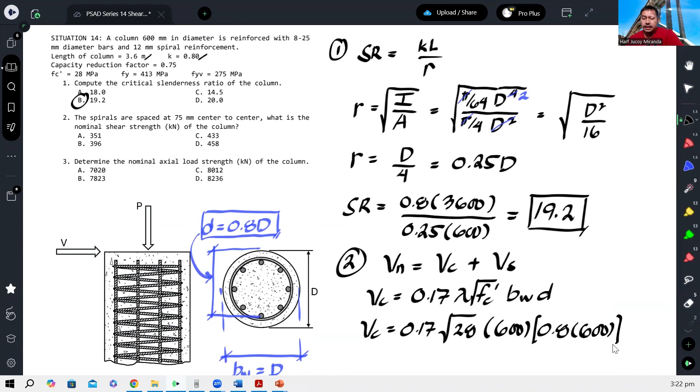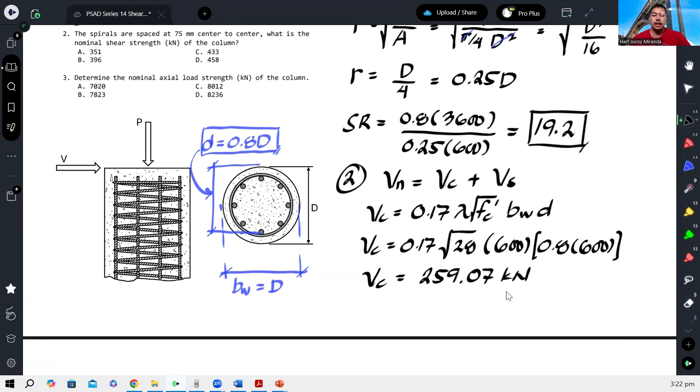Okay, and that gives us 259 kilonewtons o 259.07 kilonewtons. So pakita ko lang. Ayan. Okay, so 259.07 kilonewtons. That is the nominal shear strength provided by the concrete. Next, kumpitin naman natin yung nominal shear strength provided by the steel. No? So that is, again, AV FYV D over spacing.

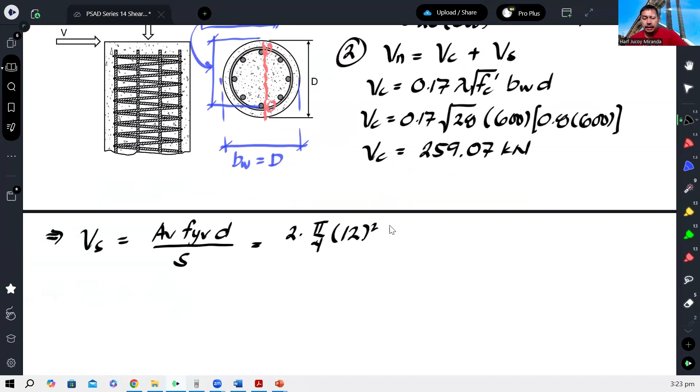So yung yield strength ng spiral ay 275. And then yung effective depth, once again, 80% ng diameter. Okay, over spacing. So yung spacing na binigay is 75. Okay, so makakompute naman natin this time yung nominal shear strength provided by the steel. So 2 times pi over 4 times 275 times 0.8 times 600 over 75.

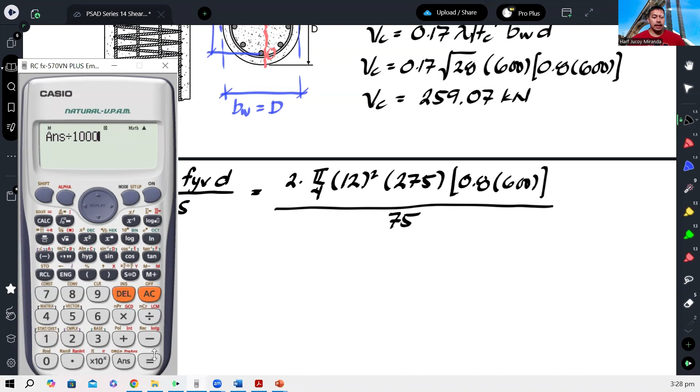Okay, so, sorry, may nakalimutan ako. Pi over 4, times 12 squared. Ayan, 75.8. Okay, so yan naman yung nominal shear strength provided by the steel. Okay, so basically, divide ng 1,000, 398.10. So 398.10 kilonewtons. Okay, and therefore, our nominal shear strength is pag pinag-add natin yung dalawa, so plus

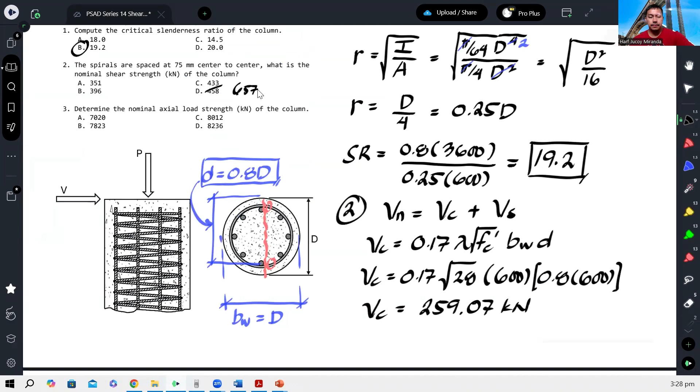259.07 gives us 657.17. So 657.17 kilonewtons. Okay? Sa choices, wala, no? Kasi actually, I think may mali doon sa reference na book nito. Okay? So, that would be supposed to be 657.17. Ayan. Okay? So, for number 3, determine the nominal axial load strength of the column.

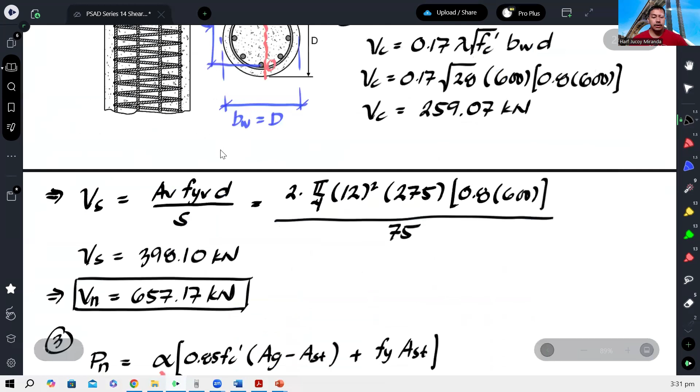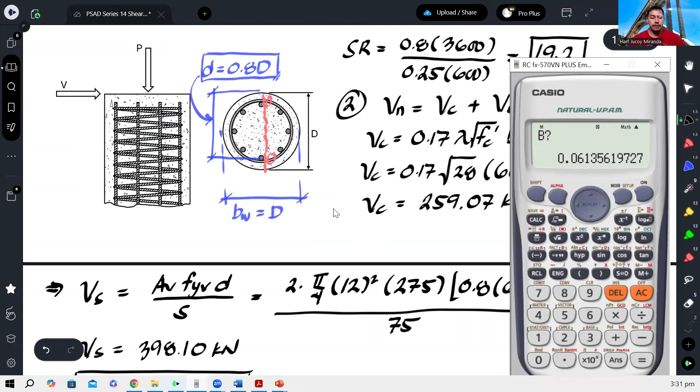So 0.85 yung adjustment factor ng spiral times 0.85 times FC prime times area ng concrete minus area ng steel. So, lagay ko na lang muna dito sa AB para hindi masyadong mahaba. Yung FY ng main bars ay 413. And then, area of the concrete or area of the steel. Okay? So, area of the concrete is pi over 4 times 600 squared. And then, area of the reinforcing main bars is 8, di ba? 8 tig 25. So, 8 times pi over 4 times 25 squared.

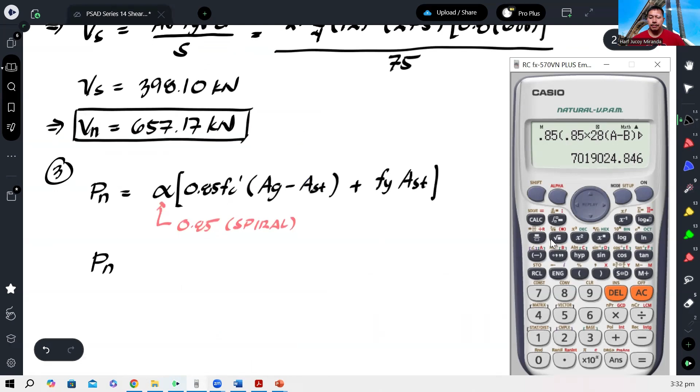Okay? And that gives us our nominal strength. So, divide lang natin ng 1,000. So, that's 7,019 kilonewtons. Which is approximately, in our choices, letter A, 7,020. Alright, so ganun lang ang pag-analyze nitong item na ito na lumabas sa board exam noong April 2024.